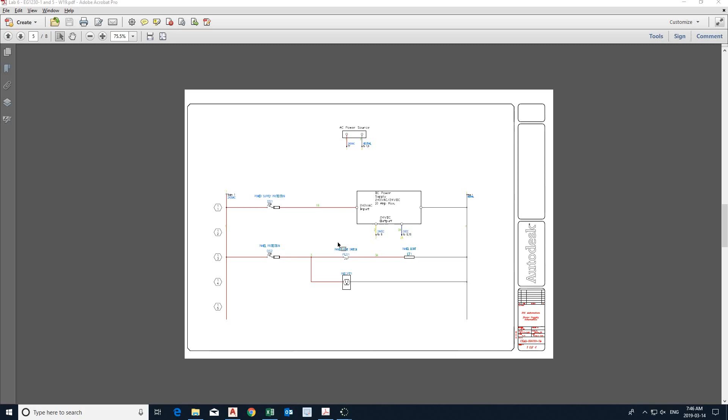So now let's get started with basics, because in the beginning you need to do a cover page, right? Let's do it with AutoCAD as well. And then we start a project, and then we add these drawings. One more thing I want you to also be able to do is how to make a template.

So remember, when we add these drawings like we did in Lab 5, every time we have to delete layout 2 and then turn off the navicube. Let's do it once and have your own template that you use for subsequent drawings, so you do it only once, not repeatedly.

So first of all, let's go to AutoCAD, and as usual, make sure the project manager is active. Close any projects you're not using. And of course, you cannot do a new project even if you right click - that doesn't happen unless you have one drawing open. This is the way Autodesk chose to do it, for some reason which is not clear, at least not to me. So anyway, now we have new project active.

So we'll say new project, give it a name - Lab 6 practice for you. I'm going to say Lab 6 for me, tutorial. And for this group, which is - my caps lock - Lab 6 tutorial, EG1230-5.

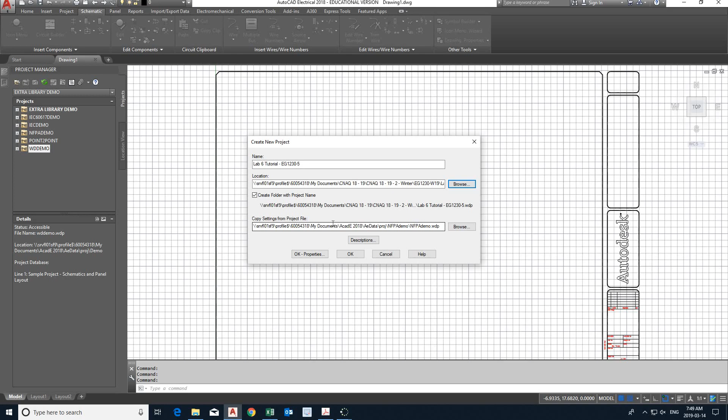Okay, and then what else do we need to do? Properties - if you forget it here, then you have to do it for every single drawing. Any properties that you create, you're going to do it in every drawing separately. So when you do it at the project level, whenever you create a new drawing, it will assume these properties. So, properties - what do we need?

What is the width? The width of the ladder - 7. And what is the spacing? 1.2, both for vertical and line spacing, multi-wire line spacing. What else do we need to do?

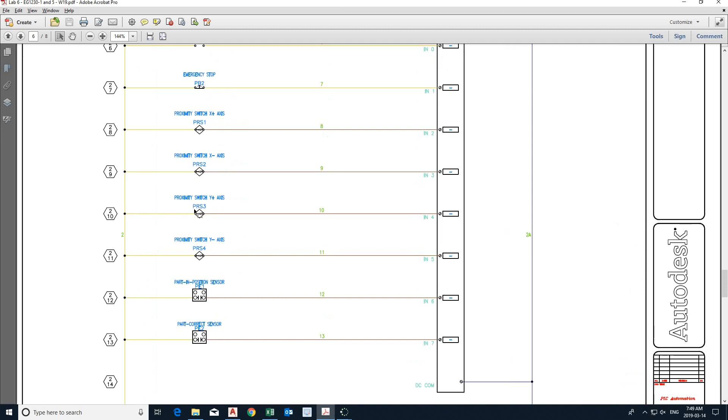What do you notice in the drawings here? Look at these numbers - they are in hexagons, sheet number and rung number. So how do we do that?

Okay, we do it at the project level. We have to go here - format, referencing - okay, so we go to setup. Then second from the bottom, it says sheet and number in hexagon. So we need to do that, and then we'll say okay, and that's it. These are the main settings we need to do at the project level.

And then we'll say okay. So now I can see my project folder here - no drawings yet. Now if you go to your Z drive, you should see it. So here's my project folder, and inside of it there are these two files.

These are project files - do not delete them, because if you delete them you cannot open the project. You can still open the individual drawings, but you cannot open them as a project. All your project settings are in these files.

Okay, so now I want to add a cover sheet. We have a cover sheet that we used in previous labs, so I can use it and put it inside this folder. There it is now - I have a cover sheet in the folder. Go ahead and do it.

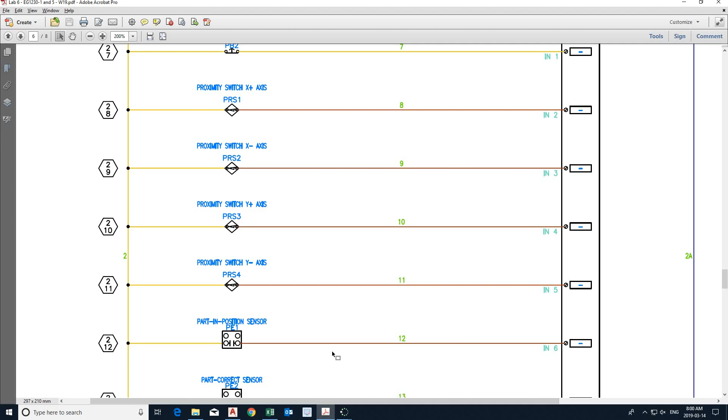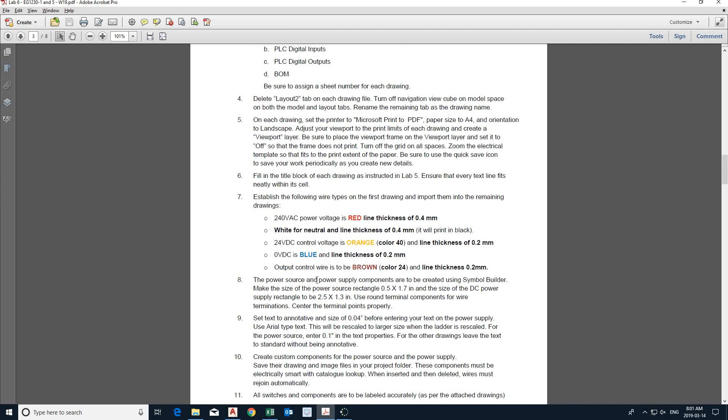So now I need to add which drawings? I need to add one drawing only, because I'm going to show you how to import the layers we need to create. You don't need to create all these layers on every individual drawing. You can create them on one drawing and then import them to the others.

So I need to create this first one. I'm going to call it power supply. Right click on the project. Of course, I can double click on the cover sheet, close this extra initial drawing that we have had to have in order to create a project.

I've seen a number of students using text to add text, but it's much simpler. You just make sure you are on paper space, move with your cursor on the text, double click, and then change to your name. Of course, this one will be Lab 6.

And then give it a quick save. Right? Now let's go and do another drawing. New drawing, and we're going to call it power supply. Make sure here we're using ACAD template.

So we'll go browse and ACAD electrical. We'll say OK. Of course, you don't need to say OK properties, because the same properties will be imported from the project. Yes, Taha. Yeah, and you need the sheet number, because the sheet number is now part of the references of the ladder rungs. So we're going to say 1 here.

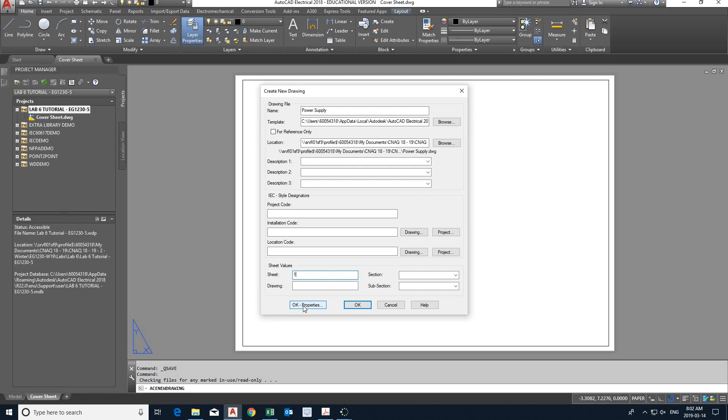Of course, you might have description as well. Here they have descriptions. You can add the descriptions as necessary, but I don't think they mention any additional descriptions. We'll say okay. Of course, if you want to check properties, you can. But we'll just say okay, and here it is.

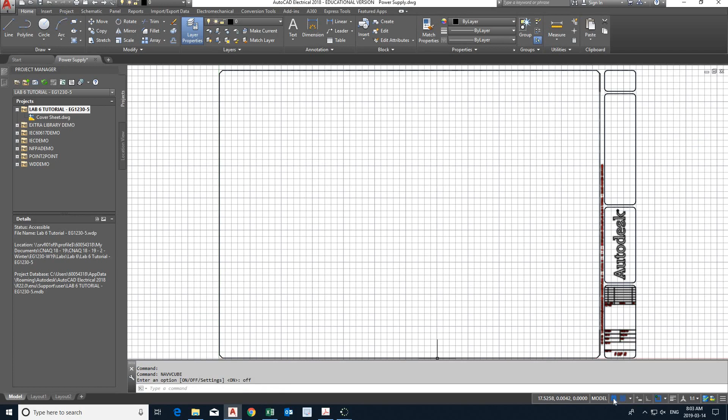See, now we're going to customize this and then save it as a template so that we can use it for subsequent drawings. So I need to do what? Get rid of the nav cube. Turn off the grid. And if you have VP control or UCS icon, also turn them off.

And then delete layout 2. And then layout 1, set it to PDF printing, and size A4. And then say OK, close.

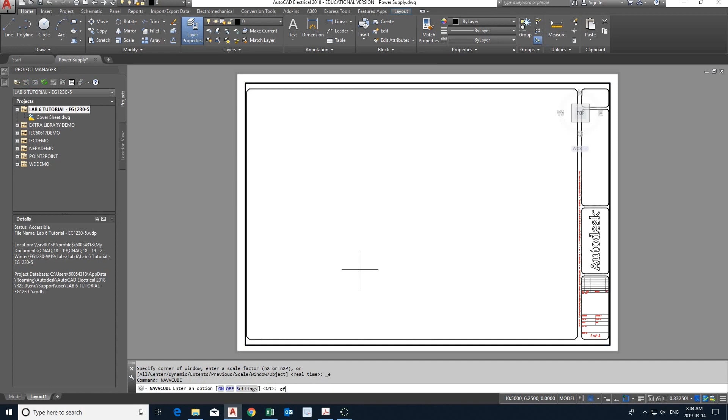What else do I need to do? I need to adjust the viewport, leave a little bit of margin on all sides. Go back to model space, double click the wheel to maximize the title block. And then again, nav cube off. What else? One more thing, I need to create a layer called viewport.

Create a layer called viewport. Then go back to paper space again, select the viewport, move it to viewport. It's moved to viewport now. And then escape to go back to layer 0.

And then go and turn off viewport. That's it. Now everything is prepared for a template. I have not yet added the other layers. The other layers are specific to Lab 6, so you might not want them to be part of your template.

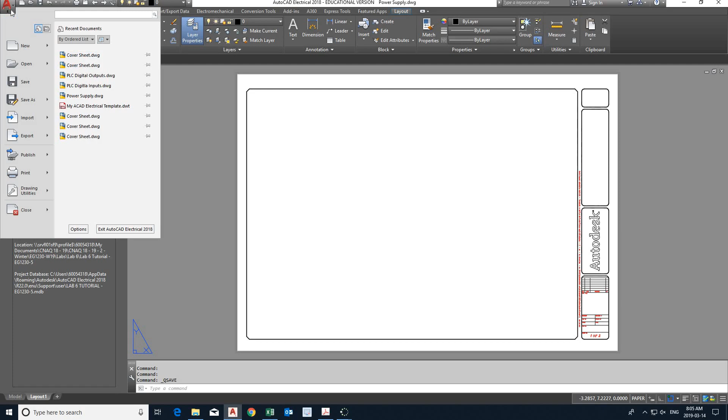So what we need to do now is save it as a drawing. That's the first step. Second step, I'm going to say File. By the way, now you should be able to refresh and see your added drawing in the project. And we should also say File, Save as Template, as a drawing template.

And then go to, you can even put it in the project folder for now. If you want to use it for other projects, you can import it or copy it to other projects later on. But for now, I'm going to put it in my project folder. So DWT. It's called power supply, but I'm just going to say my ACAD electrical template. That's what it is.

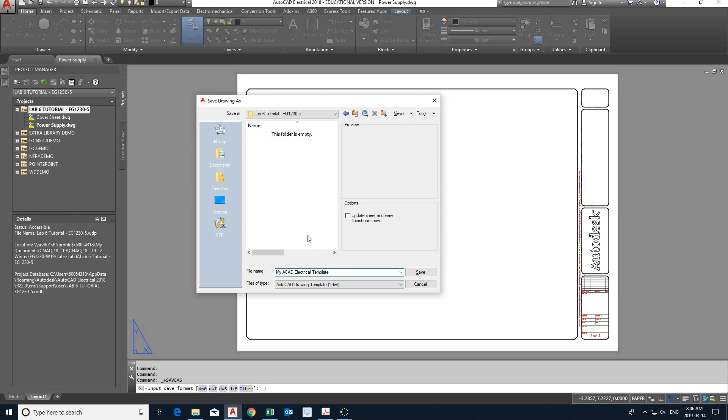And then we'll say save, and then we'll say okay. Notice what happened now, it changed to DWT. I don't want this DWT to work with, I just needed to copy the settings. So I'm going to close it and then open my DWG again.

Now I can create the other drawings. Right click, new drawing, and I think the next drawing is PLC inputs, right? PLC inputs, yes or not? Digital inputs, the PLC digital inputs. Use the same names as given. PLC digital inputs.

Why do we insist on digital? Because there are analog inputs as well. These drawings are particularly for digital inputs. Again, for template, I don't want the raw ACAD electrical, I want my template that I've just created. So I'm going to say browse, go to your project folder where that template is at.

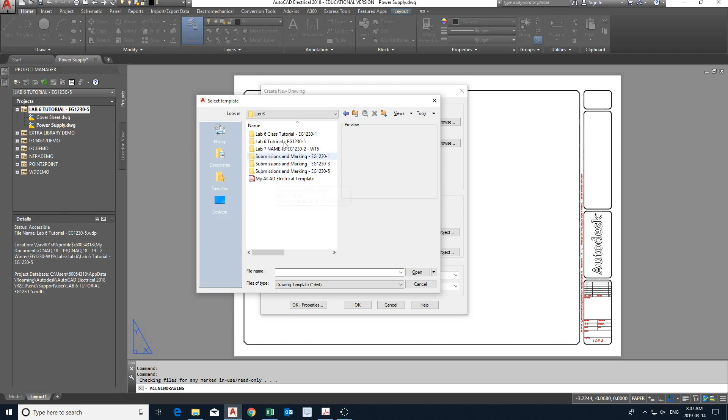And here's my template. The project folder is here, actually. Here it is, and of course this one will be sheet number 2. Do you want to apply the project's default settings? Yes, and you see now everything is set. The printer is set, layout 2 is not there, the viewport is there, the viewport frame is not showing, and also here there's no nav cube.

Just by using your own template - if you don't do that, you have to every time delete the nav cube and all that. These steps you don't need to go through if you do a template. But make sure you always work with the template as a storage of settings. Do not do any drawings in a template.

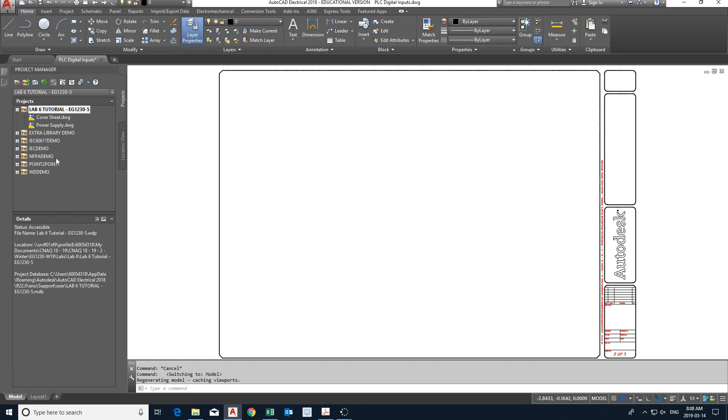All right, so right click, I'm going to say new drawing, PLC digital outputs. Again, you don't need to say browse now because it will always default to the last template used - see, but you can see it still says my ACAD electrical template, so you don't have to do it again. Now, of course, this is sheet number 3. And then we'll say okay. Yes.

Okay, now of course, PLC inputs and outputs don't show here still, so refresh, and there they are.

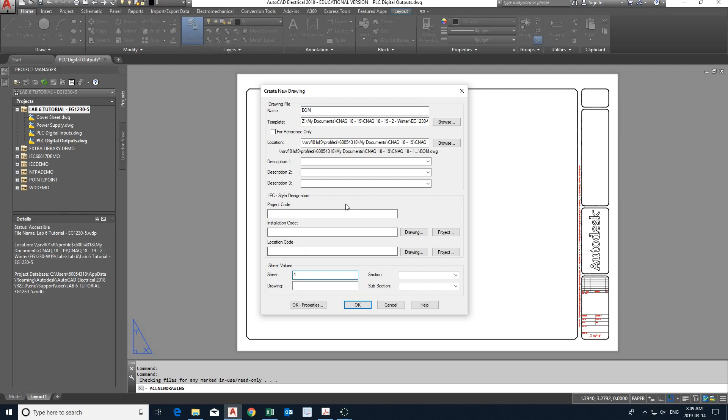Last one, BOM. New drawing. BOM, sheet number 4, and then of course still the same, my template. And then we'll say okay - very easy process once you do this. Okay, and then refresh one more time. These are all my drawings that I need for the project.

Khalas? Any question?

All right, so let's go to power supply and create - yes, Lenore. Okay, so let's continue. Now we are going to start with the power supply and show you how to do custom components.

First, let's create these layers. Again, these layers you will need for 3 drawings. There's one of 2 ways - one easy way and one long way. The easy way is to do it once and then import it to the others. The long way is to do it individually in every one, right? So let's go back and start doing layers for within power supply.

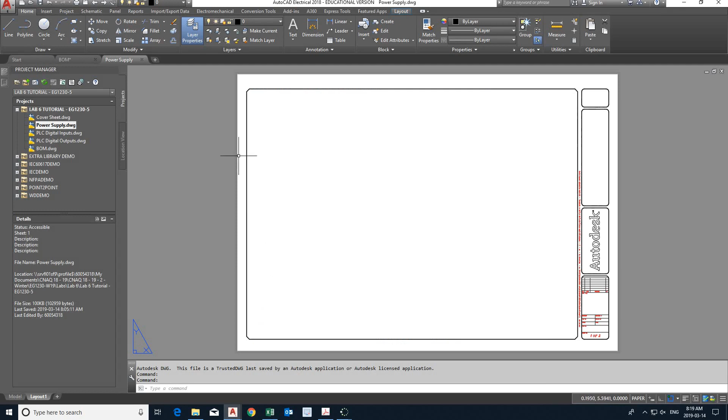So let's do this layer, and new - what's the first layer? Oh sorry, these are not layers, these are wire types. So we're gonna go schematic, and then in the edit wires, click on it, and here's where we go and do the first one: red. We're gonna call it 240 volts AC, because this is a system where we're using AC power as well as DC power. And that custom component is a DC power supply, so it takes in AC power and gives out DC power. So color is red.

And then we're going to call it 240, rename layer, 240 volts AC. And then go down here and color is red. Line weight is how much? 0.4. Very good, Taha, very good. 0.4. So here we go.

And then the next one is neutral, which is white, and thickness is also 0.4. So this is neutral - or actually, it's going to be white, right? Color is white. Okay, color - and it should say white here, or you can choose the color directly. Of course this shows black in my palette because I've chosen a white background. Your background is black, it's going to show you white.

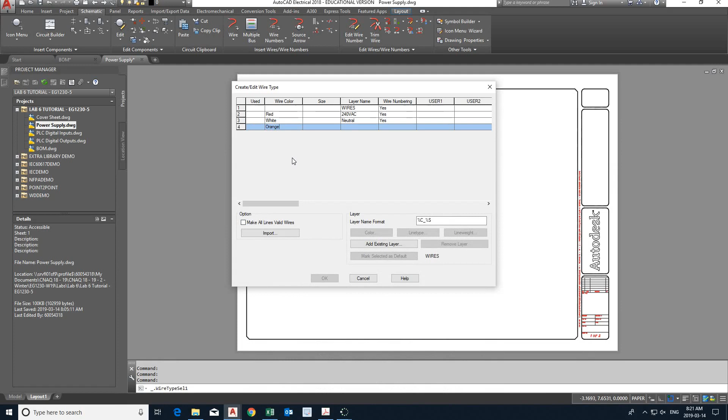So say okay, and then line weight is also 0.4. And what's the third one? Orange, 24 volts DC - so this is orange. 24 volts DC, this is DC. 24 volts DC. And the color is number what? 40, right? 40. And line thickness, 0.2.

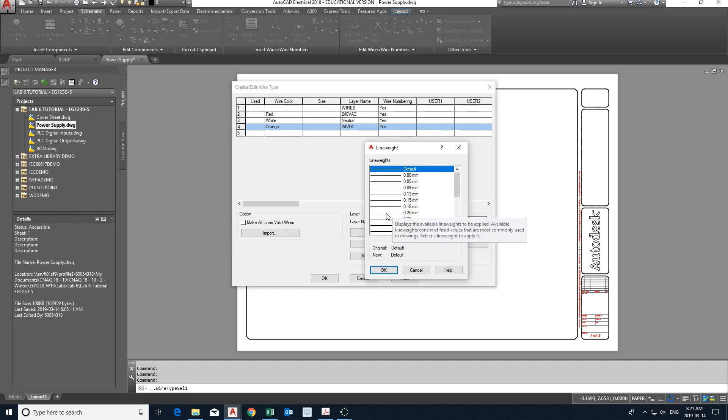Okay, what's next? Blue for 0 volts DC. Blue. Zero volts DC. Okay, color is blue. Line weight 0.2.

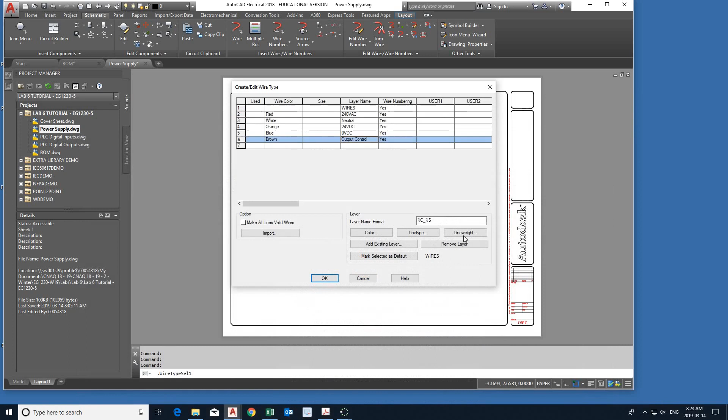Okay, what's the next one? Brown, color 24, output control. Brown. Output control. Okay, color 24. And what about line weight? 0.2 also. That's it - these are my layers.

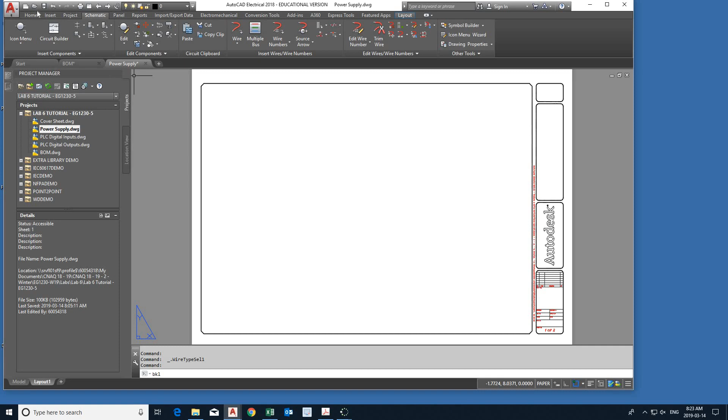Now I can go here. You have to save the file. Why? Because when I want to import, AutoCAD does not look at your current drawing, it looks at what is saved. So make sure you save, do a quick save, and then go to the digital inputs.

By the way, make sure you're always working in the model tab, because sometimes you can also work in the layout tab - you have to be very careful whether you are in paper space or model space. Okay, so let's go back again, go to model tab again, and then go to create or edit wire types. Of course, nothing is in this drawing. So now we're going to say import, and I know I've already created them in Power Supply.

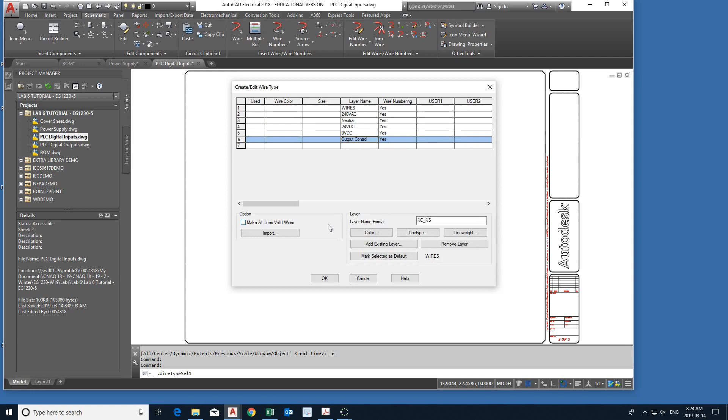So I'm going to double click, and there they are. You can choose all or one of them or a few of them, and just say okay, and there they are imported, everything including colors, including line weight. No need to go click on everyone.

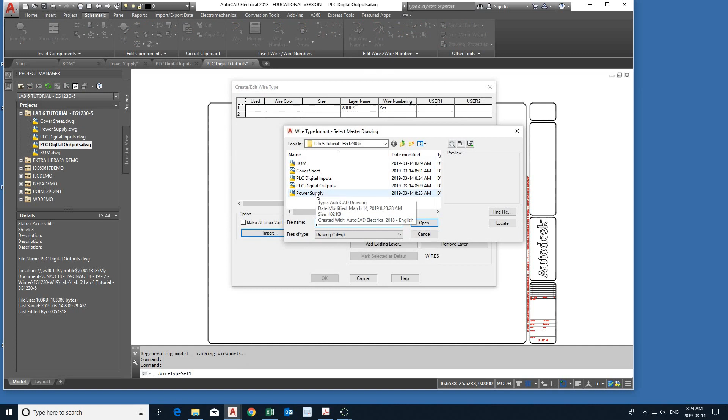So say okay, and then save, quick save, and do the same thing for digital outputs. Again, go to the model tab, wire types, import, and now I can do from digital inputs or from Power Supply. It doesn't matter because they exist in both.

And then okay, and then save. Do I need to do it for BOM? Not really, because we're not using it. We're not using any wires. Bill of Materials is just a schedule for all components. Okay, that's it, that's how you import.

So let's go to model space. By the way, on your list, should you have a different order than this, you can always move files around. Just click and hold, and then move it. Like, for example, I can take cover sheet and put it at the bottom or anywhere in between, where it of course doesn't belong there. But if any of these is incorrectly placed, you just click and hold and move it.

Because let's go to Power Supply - of course it's not open in my case, so you can open it. And even these here, you can order them as well, these tabs, you can order them as well at the end, so you can put them in order. You can go this way, or you can use the project manager. And if you want more room, you can close the project manager because you can move between these drawings now, so this will give you more room if you close it. Anytime you want it back, again, there it is.

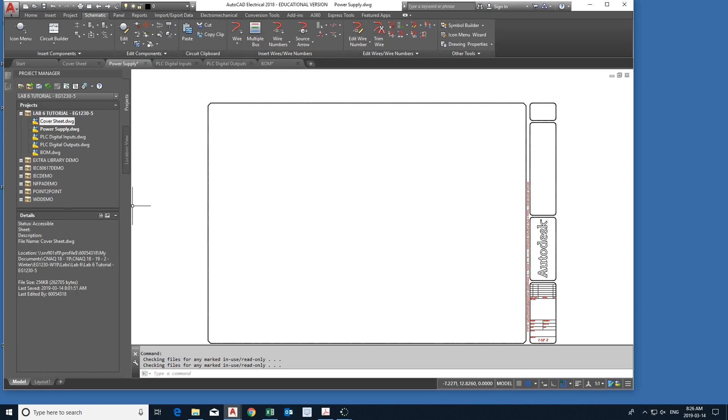All right, so go to model space in Power Supply. Model space, and let's create the first, well, the main rung, right? How many rungs do I need? I need 5 of them. Look at the left: 1, 2, 3, 4, 5. Of course, this is sheet 1.

Now, okay, this has happened a couple of times. What he said was when he creates the ladder, he doesn't see the numbers on the left. And that usually is because you have viewport as your current layer. If it is and it's turned off, if you turn it back on, you will see the numbers. But you should make sure your current layer is layer 0 before you put anything in. Your current layer should be layer 0.

And now we can go schematic and add a ladder. How many rungs? 5 rungs. Okay, and we'll say okay, and then click. There they are - sheet number in hexagon with sheet number and rung number.

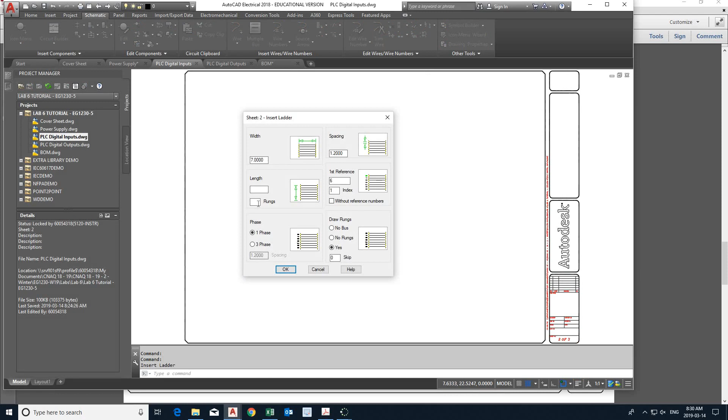Okay, let's do the rungs for the inputs and outputs. Let's look at it. All right, how many do I have? Starting from 6 all the way to 15, so how many is that? 10, 10, okay. So ladder, 10 rungs. Okay, click, there they are.

Starting from 6 all the way to 15. And if you look carefully, the lowest rung is deleted - you don't need the lowest rung, it's just there for space. So if we go back here, we can go trim, wire trim. Don't use delete with the wires. Okay, trim, and then trim this lowest one.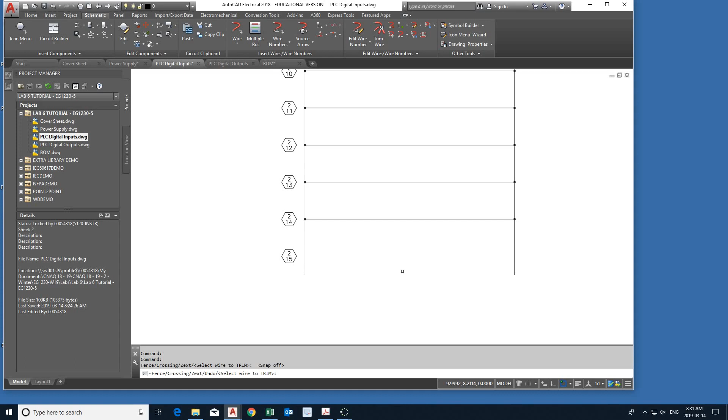Okay, sometimes the snap to grid interferes, so you can turn it off temporarily or keep it off. Now you have a smooth motion of your mouse, and you can click, and that's it. Escape. And always save, save, save - whenever you do something, save.

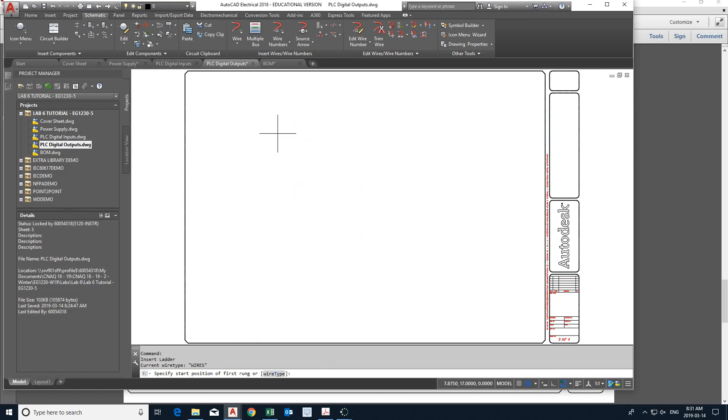All right, let's go and do the outputs. Digital outputs, how many rungs? Well, starting from 16 all the way to 27, 12. 12 rungs. So again, insert rungs and then 12. Okay, and there they are, starting from 16, and sheet number is 3, all the way to 27. And then save.

Let's go back to power supply. Let's do now the custom component, and make sure that it is electrically smart. Okay, so in order to do custom component, we use symbol builder. So we click on this symbol builder. And to start with, don't worry about any of this, just say okay.

Now, you can see the screen is becoming a little crowded, so I can turn off the project manager. And this palette, we're not going to need it for this symbol, so just turn it off. You should see only this toolbar.

Okay, what are the dimensions of the rectangle for that? 2.5 by 1.3, isn't it? So we're going to go to the Home tab, and then do a rectangle. Click anywhere, as before, at 2.5, 1.3. You can double click and then zoom out a little bit so you can see it.

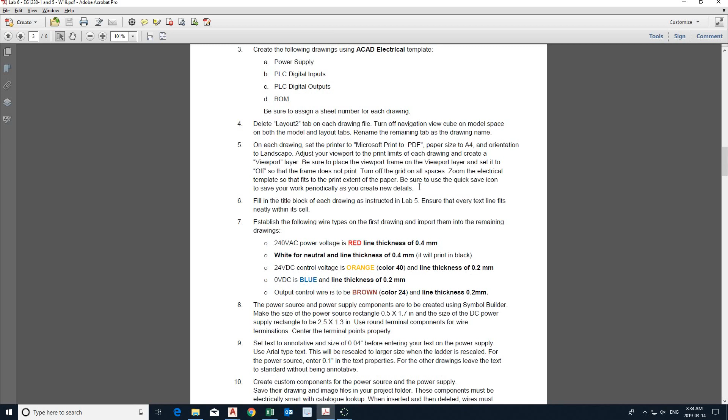2.5 by 1.3, it's written here in the instructions. If you look at the instructions, you will see it right here, 2.5 by 1.3 inches. Why inches? Because ACAD electrical is in imperial units, so it's in inches. It's not in millimeters as before.

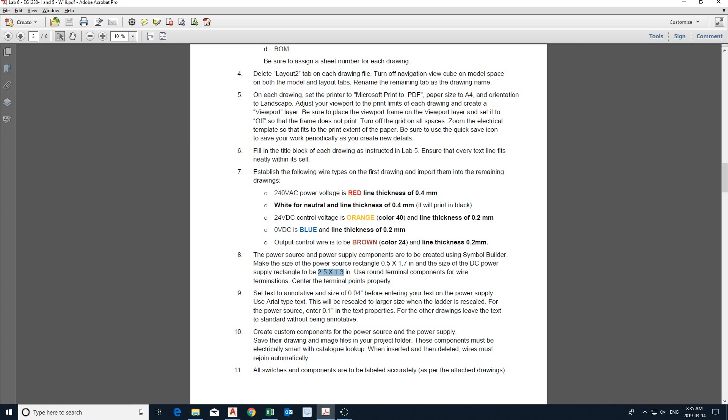Okay, now we need to do what? We need some terminals. You can see we have 6 terminals that we need to add. This is the part that we are doing. Yeah, we can use connectors.

So let's go back here, then go to schematic, icon menu, and then you've got here terminal connectors. Here's a round connector.

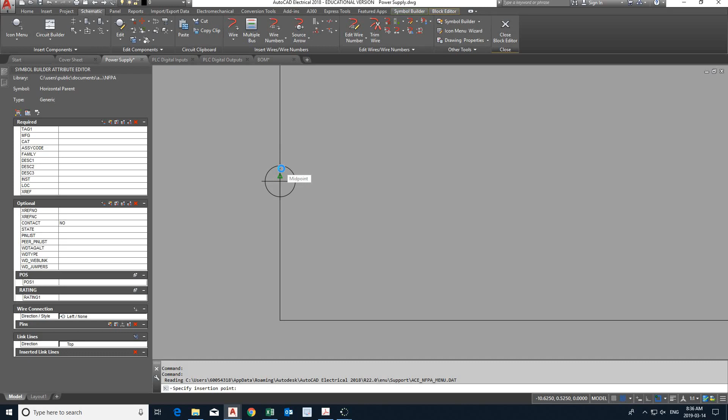If your snap to grid is interfering, of course, as soon as it lights up, that green snap, if you click, it will go there. And notice how it automatically broke up the line. It's a connector. But if your snap is interfering, you can turn it off.

Again, one more time: icon menu, and then there is terminal connectors, then you go round connector. And then you go here, click. And then you do it 2 more times. Round connector.

Sometimes it will try to jump, so I can turn off my snaps as well. And then, or I can put it at the end. Well, with this one, you can right click, shift right click, and say mid between 2 points. So I want this point and this point.

There it is. See, sometimes it doesn't break the line, sometimes it doesn't, sometimes it does. But I'll show you how to clean it up.

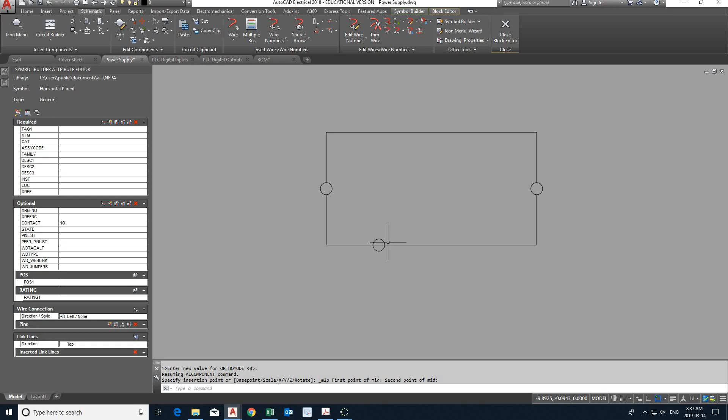Yes, you can do trim, but this one is actually a smart component, so it will not allow you to use it as boundaries. You can try it. I have the trim command from home. Like if I go like this here and then choose this as a boundary, same as we did before, and we say trim, and then you go inside, it doesn't do it. So I will show you how to do it.

For you, did you use circle or did you use round connector? Yeah, the circle, because it's not. I said when you use, like I did here, when you use the round connector, it's a smart component. There's more to it than just the circle. Okay, but with the circle, yes, it does work, if you just use a circle, which is fine.

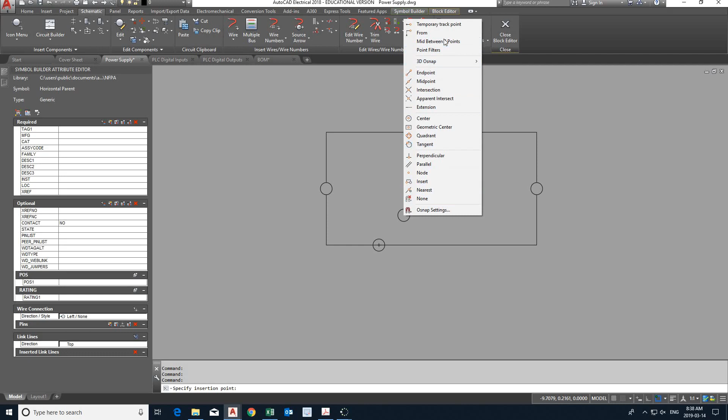Okay, so one last round connector, shift, right click, mid between 2 points, between this point and this point. All right, now.

Wait, I want to trim this, but now this is a smart component. So what do I do to trim it? Go home and make simple lines, like from here, go vertically up.

And then take this, copy it from the bottom to the other quadrant. Now I can choose these 2 lines, and I'll say trim, and trim this guy. Khalas. And then take these 2, move them to the other connector, move from here to there. And then again, choose these 2 lines and go trim. I can trim this one. And now, delete these.

By the way, some of you are using circle, it's fine, no problem. But this is where I am now with my smart component.

Let's add the text. So what are we going to call this? DC power supply, 240 volts AC to 24 volts DC, 10 amp max. DC power supply, and you can see it's big, so I can say Control A and change this from 0.2 to 0.1.

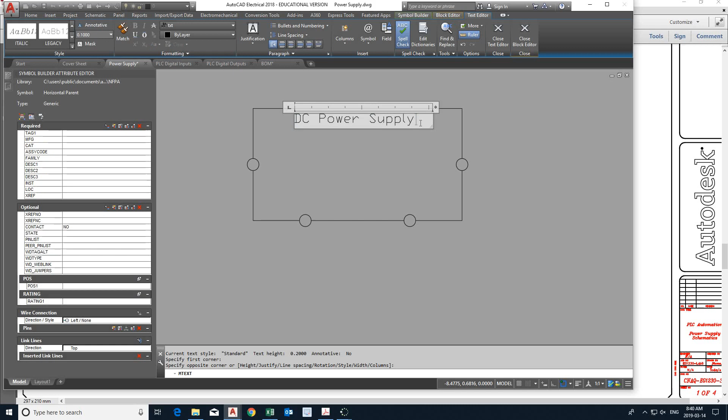And enter. 240 volts AC slash 24 volts DC, meaning the input is 240 and the output is 24 volts DC, 10 amp max. Of course, I can also center all these.

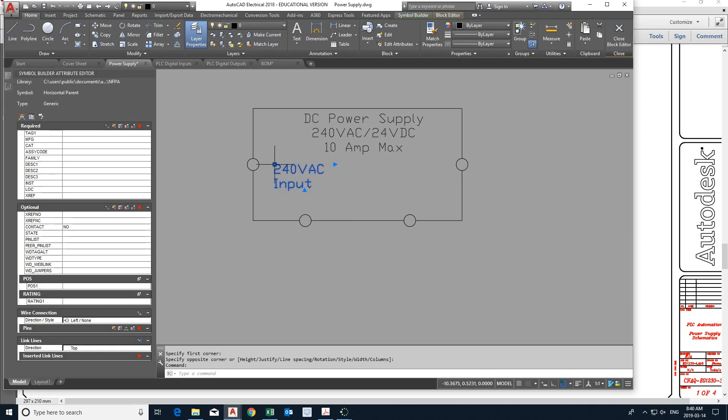Okay, and then do the same thing, and we'll say 240 volts VAC input, and change it to 0.1. Adjust. Move it a little bit. And you can do copy and paste, and this is like working in your normal CAD.

And then we're going to call this, double click. This is what? 24 volts DC output. So in other words, these 2 terminals is where we connect the 240 volts AC, and this is where we get the 24 volts DC output. Okay, let's put some connectors in now.

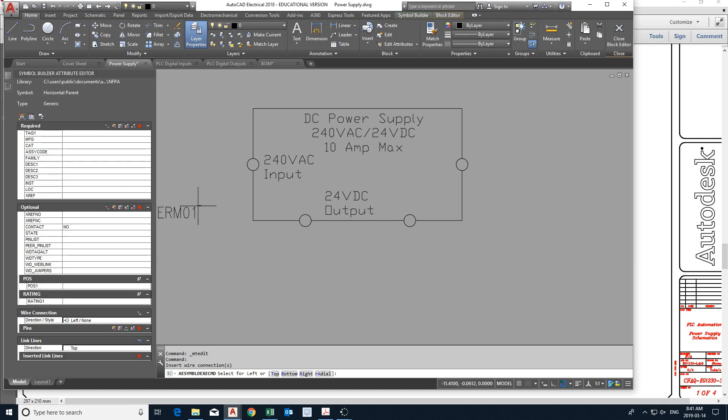Connectors have to be smart in order for it to work automatically. So here, if you go down, it says wire connection, and the default is left or none, meaning the wire has to come from the left side. We'll leave that. And then here at the top right, second from right, it says insert wire connector. Click it.

Make sure the quadrants is turned on, your snaps. Make sure that your quadrant snaps are turned on. And then we'll go to the quadrant and place it there. And then escape. I don't have any other left. I don't know why sometimes it just changes the window size by itself.

Or we'll do the other ones. So now there's a drop down menu here. If I click on the white space, a drop down menu comes out. And I want to do the next one, right or none. Right side or none. So here is right or none. And then click again on this insert wire connector

command. So there it is. And then escape again. It's waiting for you to do more. You can do more at once. And then escape. I'm done with right or none. Now I want to do bottom or none.

Bottom or none. So down, again, down menu. And then bottom or none. Click it. And then click on connector or connection. And then from the bottom quadrant. And now I can do the other one without having to go escape because it's also at the bottom. And then I'm done. Escape. So it says terminal 1, 2, 3, and 4.

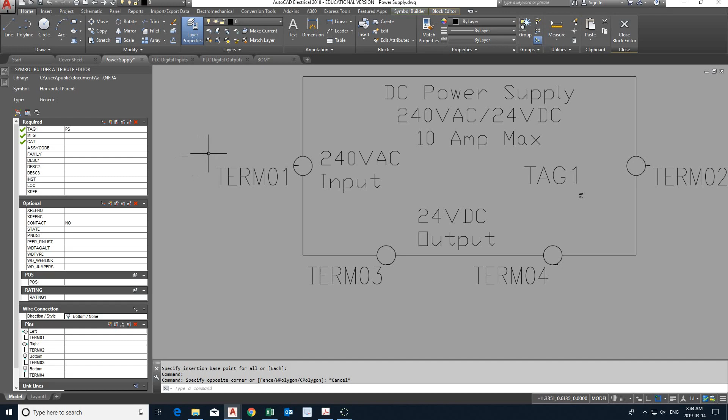Now, actually I can put the tag, this tag, right here. It didn't have a tag here, but that's okay. You don't need a tag, but I put it here. But you need - if you don't want a tag to show, you have to choose a few of these. Otherwise, your component will not be smart, as I told you. If you don't want a tag to appear, you can delete this stuff.

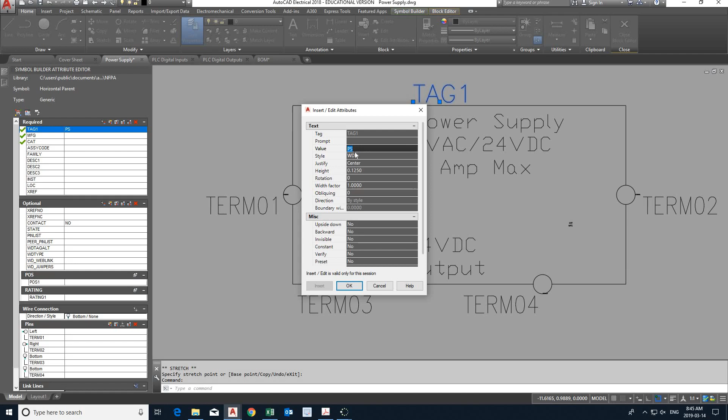I don't want the value here. I can delete it. If I don't want it to show, I can delete it. Still, the tag will be there without showing any name. Okay, now I'm done. I need to say close block editor. Close block editor.

Now, here, if I want to do a search, a library search, drop down menu and go to power supply. Power supplies. So you need to pay attention, because if you don't do this correctly, especially if you don't give it where you want this component to be picked up from, you're going to see, oh, it's not coming. It might be somewhere else, off screen.

So first of all, we need to tell it this is a power supply. Secondly, we need to tell it to place - because it will create a drawing file and an image file for your component, so you can use it as many times as you want. We're going to go - of course it assumes a default directory, but I want to put it in my project folder. Please pay attention, because you're going to need to do this for assignment 2, and for the final assignment as well.

Your components - I want to see them for marking purposes. So browse and go to your Z drive, and go to the project folder. Okay, so lab 6. And where's my project folder? It's right here for this group.

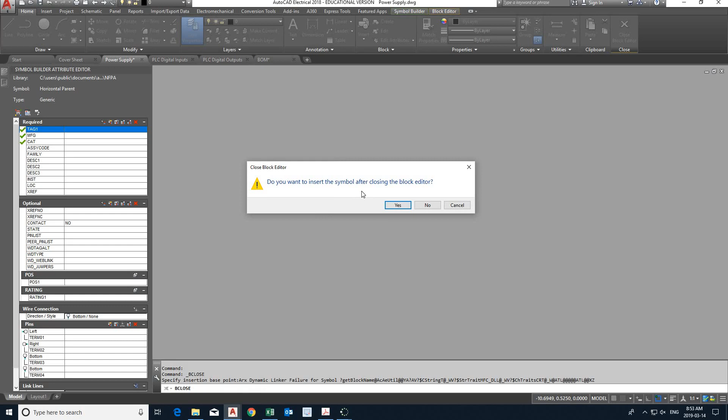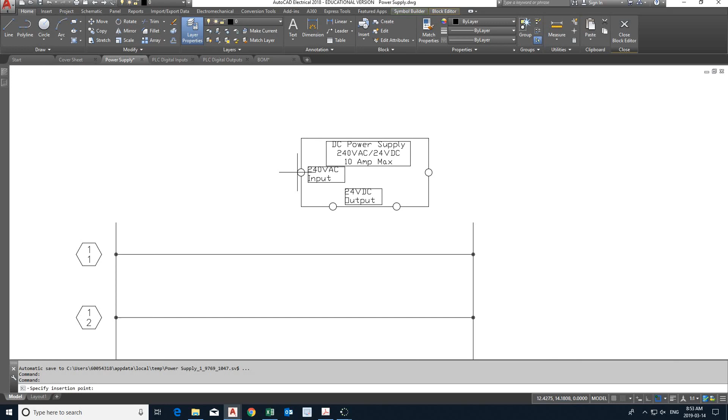It has put in some values here, and I will say okay. Do you want to insert the symbol after closing the block editor? And I will say yes. And there it is, already attached to my mouse icon.

So place it. Of course, again, my snaps are coming. If I don't want them to be interfering, I can turn them off temporarily. And then place it, and notice how it will break the line automatically. There, and notice it has opened this window, meaning that it is smart. So I can give it a name or leave this blank and just say okay.

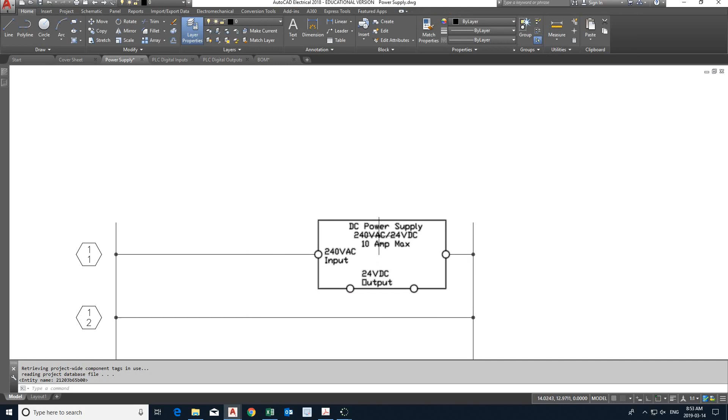Notice if I right click, this menu appears, meaning it's electrically smart. So if I say delete, look at what happens. It went back and rejoined the wire.

Well, suppose now I want to insert it. I go to schematic, icon menu, and then go browse this time. Of course, there's a way to put it in the library, but for now, let's keep it simple. So browse and go to the project folder. You can see this is my component right here.

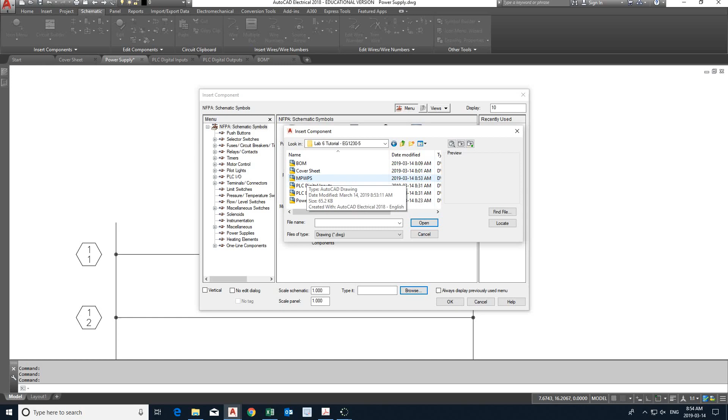Double click, there it is again, in the same pick point. And then place it. If you don't want any tag, just take out the tag and say okay, leave it like it is. Khalas.

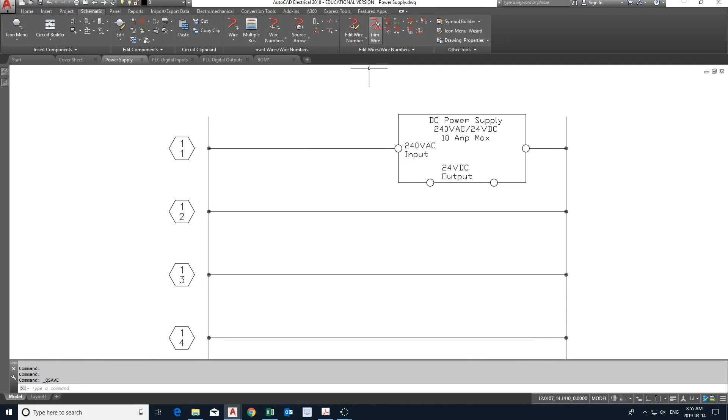Now, always save, save, save. When you do something, save. Trim, I don't need this rung. And what else? The fifth one, we don't need that.

And then what else? I need a wire this way and start placing components as before. What's new? Source and destination. So I'm going to show you that as well. These components are the same as before, but I need to do these sources, and these are called destinations. Look at how the arrows are. Sources, the arrows are pointing out. Destinations, the arrows are pointing into the wires.

These are sources, this is like electrical connections. We're saying this is acting as a source to the power rails, and will act as a source to the other power rails as well, because this control system uses 24 volts DC, but the main source is 240 volts AC.

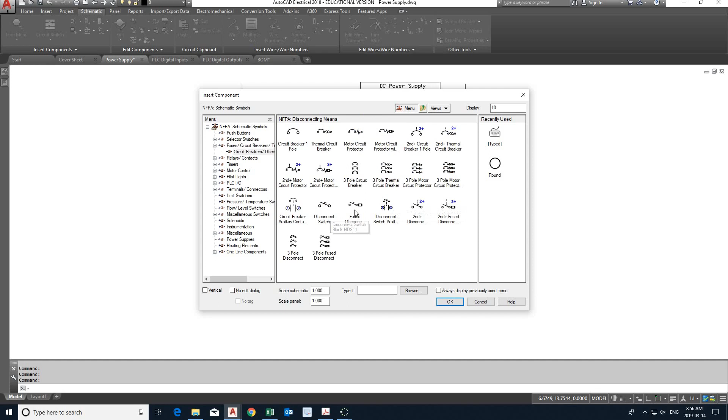DS1. Icon menu. And breakers, fuses, disconnects, single phase. This one, fused disconnect. And then place it here.

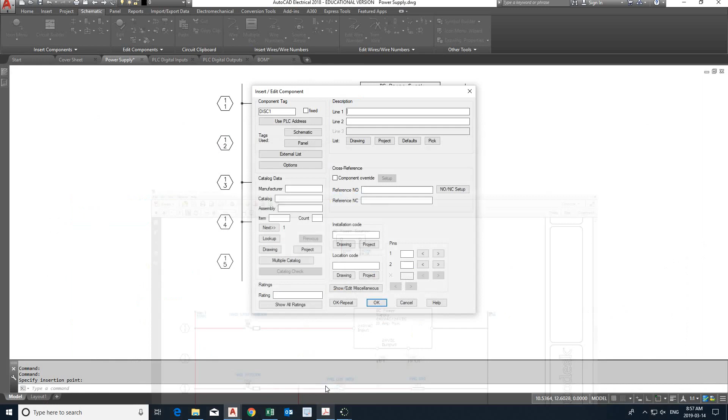Okay, what do you... Yeah, we're going to do it now. Just wait, you have to put the symbol first before you can look it up. So it's DS1, the tag is DS1, and it's power supply protection. So this one should be DS1, and this is power supply protection.

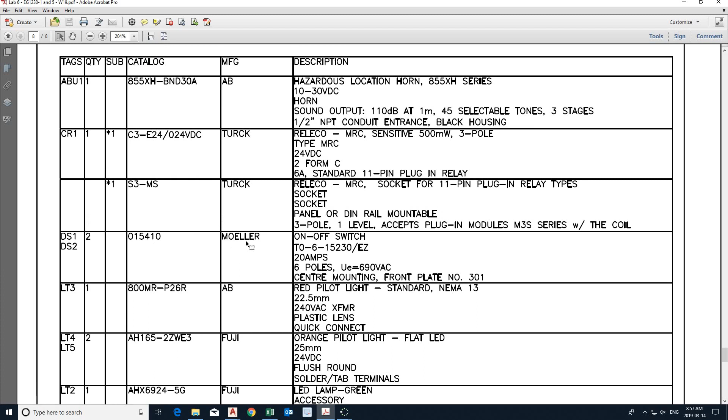Okay, now I need to do a lookup. What is the part number? Well, the part number is at the end in this list. Unfortunately, this one is not text-based, so we have to... you cannot copy and paste. So it's 015410, made by Moeller. Zero, 15410.

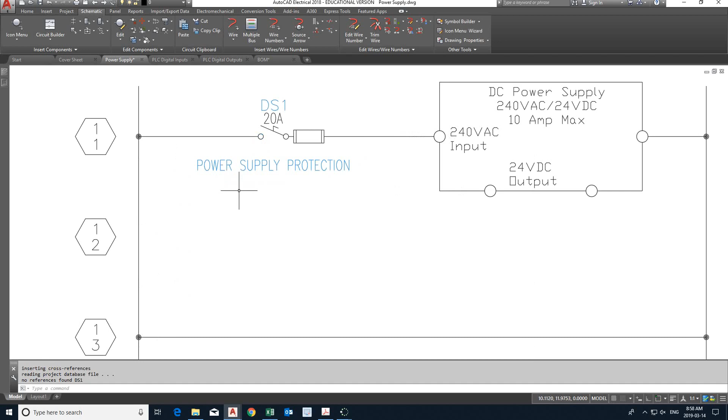There it is, double click it, and then we'll say OK. And there it is. Of course, again, if you want to move the text to show it the same as in the lab instructions, there it is.

Again, save, save, save, just one click away. What else? I have...

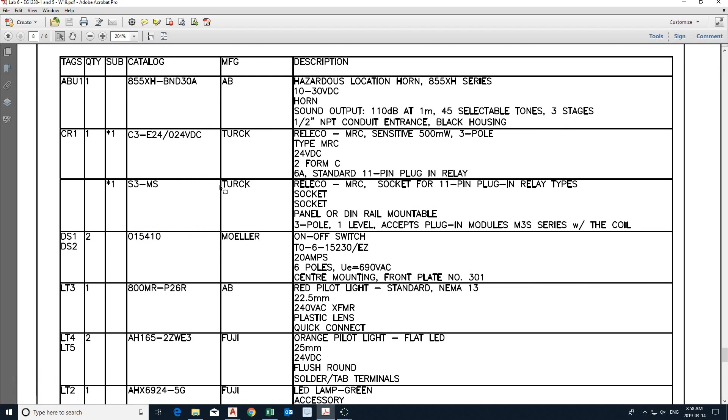Another one. See, now I can do it from scratch, or I can copy it, so I don't have to do a lookup again. So I can right click, copy component at the bottom, and then put it right here. I can hold the shift key so that it is exactly below it, vertically.

And this is called DS2? DS2, and what is it called, what is the description? Panel protection or what? Panel protection. I see now the part number or catalog is already inserted. We'll just say OK. All right, what do I need? I need a switch now.

Switch. Yeah, so miscellaneous switches, and this is it. And there's the switch. There's no lookup for this.

What is the tag number? What's the tag? PLS1. PLS1, panel light switch. Switch.

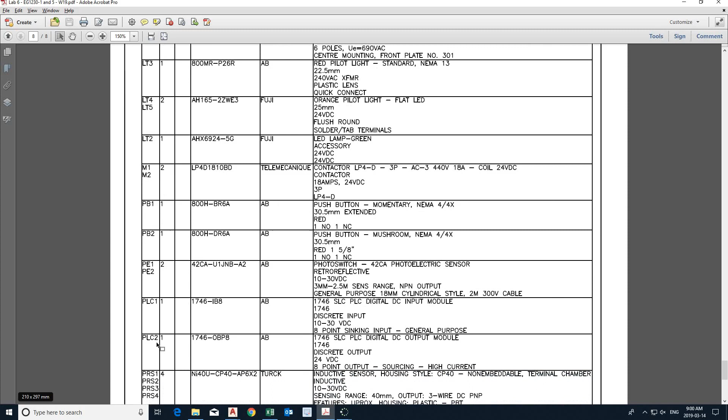There is no lookup. If you go to the bill of materials, you will not find PLS1. By the way, this is alphabetically sorted, so there is no PLS1. See, there's PLC and there's PRS. Khalas, so if it's not here, you don't have to do a lookup.

Okay, we'll just say okay, now let's do the light. Let's do the light. We'll go to miscellaneous, and there it is, enclosure light. And place it. Okay, what is the tag number?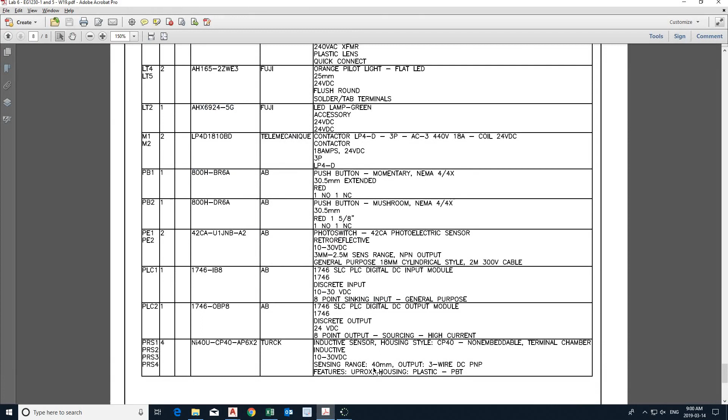LT1 panel light. LT1 for tag, panel light, and okay.

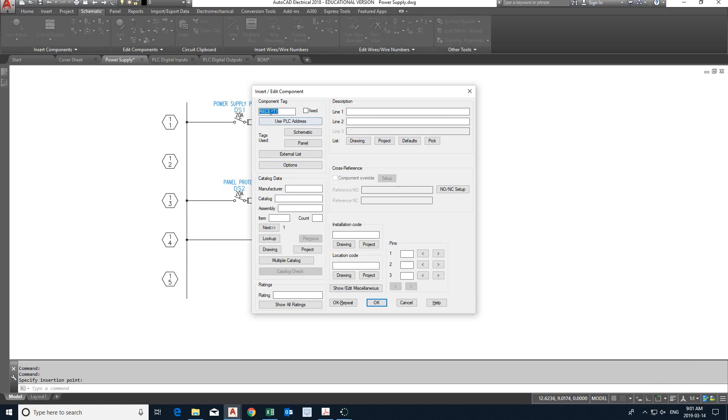One last item is the receptacle. Click, miscellaneous, receptacles, then single, this one, and place it. Is there a tag number? No tag... oh, there is. Recept 1. Tag, no description, it says RECPT, capitals, recept 1. And then we'll say OK.

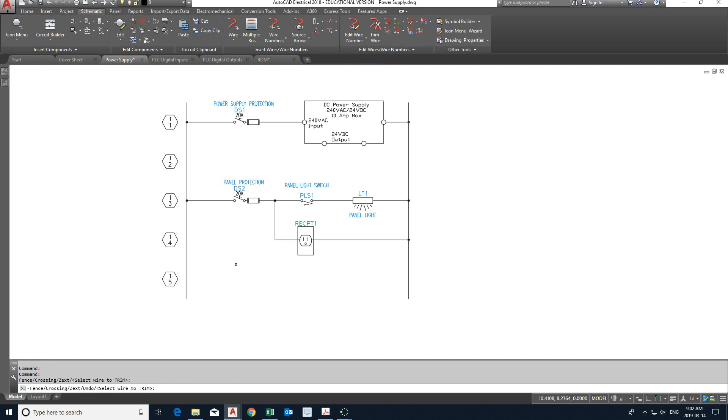Of course, now I have a line, I need my snaps. You can work without them, but here I have one line connected between these two. Then trim with a trimmer, not with delete. There it is. And then save.

Let's do now the main power supply. What is the size of the rectangle? 1.3 by 0.7? Rectangle of the small one. So we'll say 1.7, comma, 0.5. Enter.

Okay, then what I need is two connectors. Two connectors.

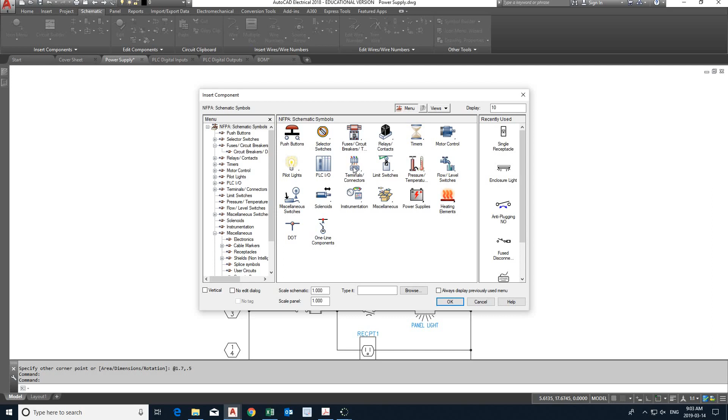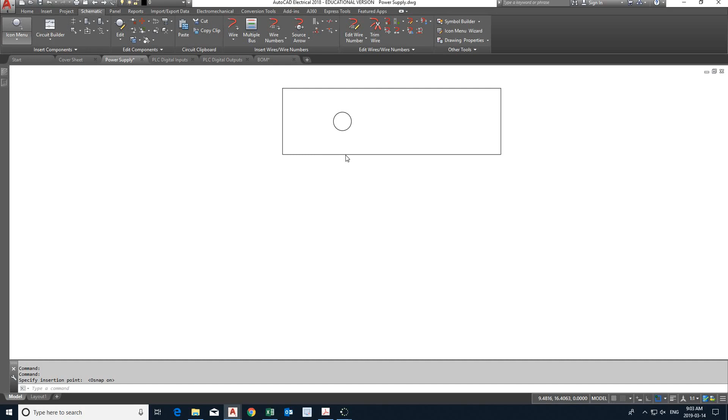So we'll go schematic, icon menu, and we'll go connectors, round connector. I want to be here somewhere. I need my snaps, I can put a line in the middle here as a guide, or I can use the snap to middle and let AutoCAD give me a reference automatically. You don't have to be very specific about this. But now let's do the other one, round from this side and go to the left. And that's good, that's good.

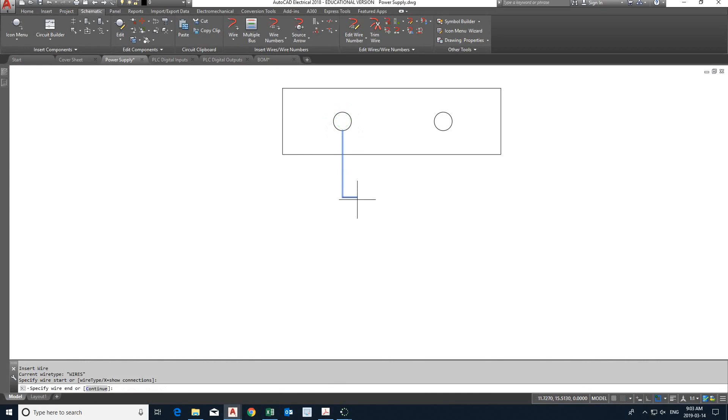Now let's make two wires coming down vertically from these connectors. Wire, lower quadrant, go down, connected to the other one, and then trim. That's it.

Now let's change this to what? This is 240 volts AC, the wire type, 240 volts AC, red. We'll say OK. And then the other one also, right click, change wire type, neutral.

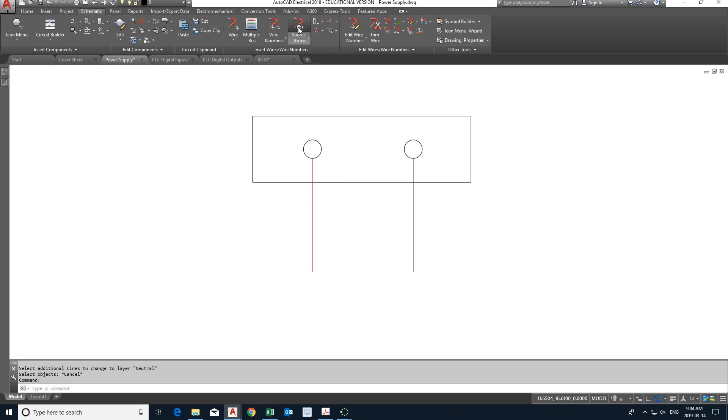That's it, now let's do the source. Let's put source arrow right here. Source arrow, and then come to the end of the line and click. Code, we're going to say code 1. And then 240 volts AC, right? That's what we have right here. And then we'll say OK. That is the source, and just say OK. I want to do now the destination.

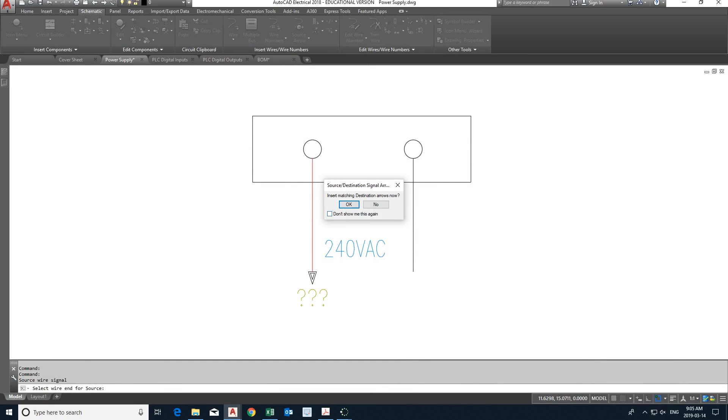It gives you a chance to also specify the destination. And look now what happens when I do the destination. Destination is the top of this line, click, and yes, see now they automatically assume the same color. The question marks, okay, don't fuss about them. Always try to follow the instructions. It says number 1 here. Any extra question marks, you can get rid of them.

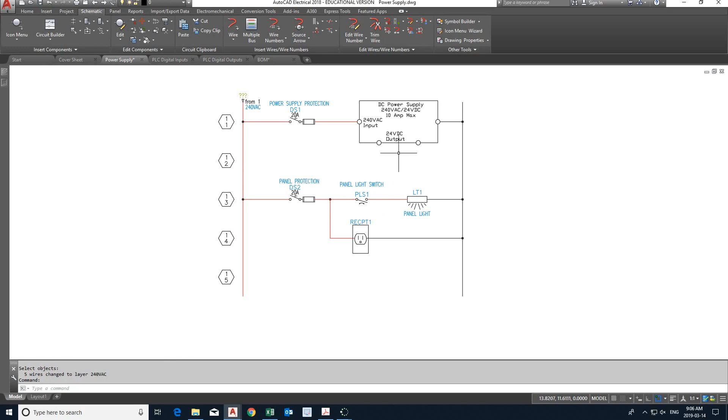Let's do the same thing. Well, obviously, I still have this one to be 240 volts AC. What else do I have? And 240 volts AC, also this stuff, and this one. Enter. And the other ones are neutral. Yeah, so let's do now the next arrow, right click, convert, and then this is the neutral.

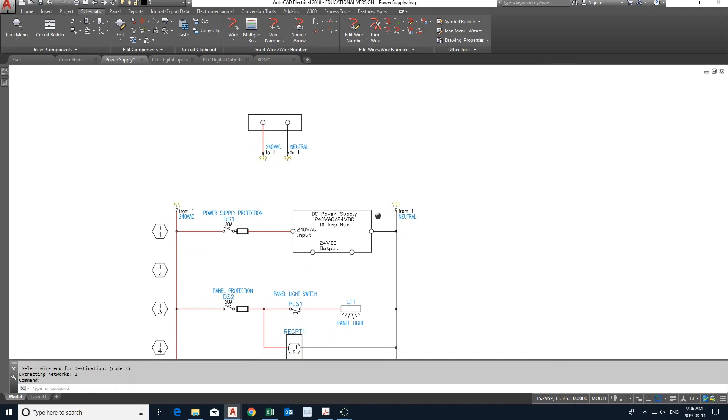Yeah, let's see now, source arrow, here, go to neutral. Neutral, and we'll say okay. Okay, and then this guy. Yes, there it is. Now again, double click and you can delete these question marks if we have no use for them.

Because that's what we have to do now, the wire numbers. We have to do the wire numbers. So if I do wire numbers, it has to be line reference. Of course, I can do it drawing wide or I can do it project wide. So when you finish the other wiring drawings for inputs and outputs, you can do it project wide. But for now, even if I do project wide now, there's nothing else. So I can go project wide and then say okay, do all. That's how it happens, similar to the bill of materials. You say okay, quick save, yes. There, here are your numbers now.

Okay, you might see some variations, this 1 and 1A instead of 2. Don't worry about that, it's okay. The idea here is how to build custom components, make them electrically smart, how to do sources and destinations. These are the only new items, everything else you have done before. Okay?

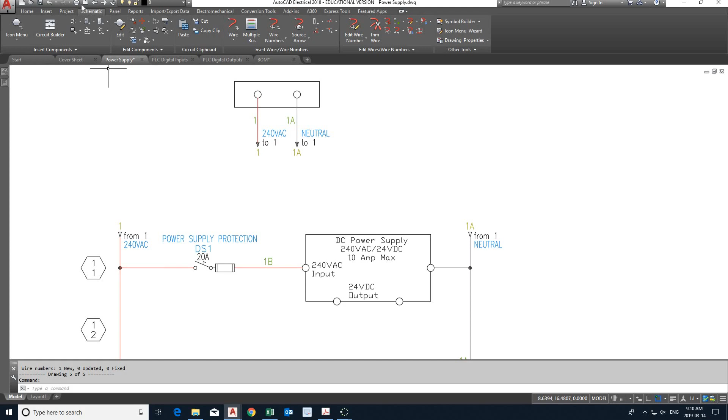So now we have to do the same thing for the 24 volts DC. Establish sources here. And then when we go to the other drawings, we have to do destinations here, but the destinations are 24 volts DC. So you have to say destination arrow, and you have to go project wide, and then choose from a list, as I showed in the other tutorial.